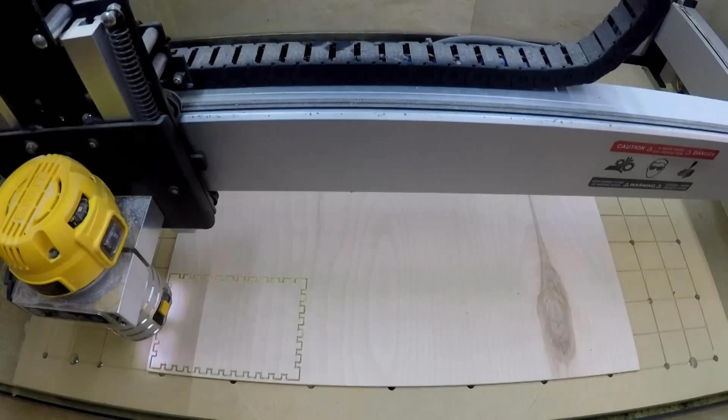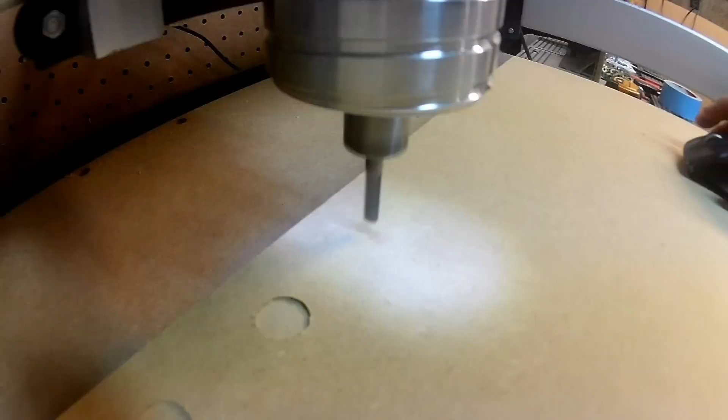Alright guys, so as you can see out here on the table, I've got a few things. This is some of the stuff that you might need to start this project if you decide to do it the way that I'm going to show you. You're going to need some 1/4-20 bolts, some washers, some 1/4-20 T-nuts, some 3/4 inch stock, and something like this possibly. I'll show you what this is used for here in a minute. We'll get rid of this for now.

So to start with, our 3/4 inch stock. If you just go to Lowe's or Home Depot, you can get poplar, pine, oak, and you can buy it in a 5.5 by 24 inch board. And if I remember correctly, once we get into actually designing this, that's the general size that I use to start with. And what you should end up with when you're done is basically just a rectangle with a slot cut in it, a hole on one end with a nut in it, and a rabbet cut in the end of that. So this is a pretty simple design for a hold down.

Now, one thing I didn't mention in the last video of some things that you should buy to get started was some double-sided tape. When I first started, I used double-sided tape for everything, and it does work, but I wanted a more permanent solution that I didn't have to keep spending money on, and something that I didn't have to do as much work. Because with double-sided tape, you have to cut, stick, peel. It's just a pain in the butt. But for your first couple projects, this might come in handy.

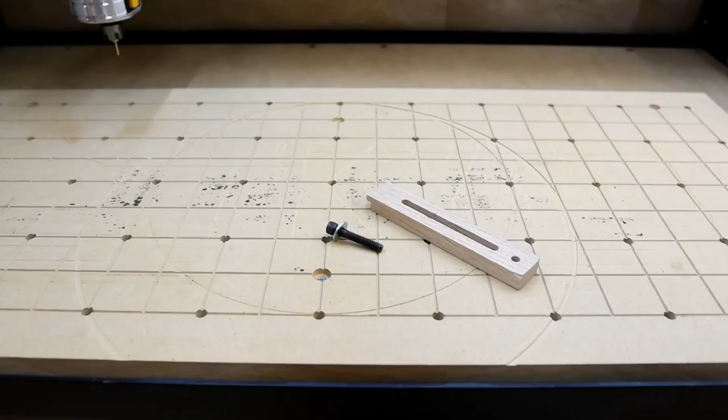Aside from the hold downs, the second thing we're going to discuss is our wasteboard, and this is what the hold downs are going to connect to. Now, I'm not going to go through and design a wasteboard in this video because I have another one that I made where I go through in detail on how to make this. I'll put a link at the bottom in the description so you can watch that video and get an idea of how to make a wasteboard.

The basic concept is you put your stock on the board. This will go next to your stock, and then your bolt goes in and it holds it down. You tighten it and it won't move. So pretty simple concept. What you're going to need also is probably a sheet of MDF, maybe even just a half sheet if you don't want to buy a full one.

MDF is pretty common as wasteboard material. It's not super expensive, and I bought a full sheet when I bought my machine. I've made 3 or 4 separate wasteboards now, and I still have a ton of it left, so it'll last you a while as long as you take care of it. Anyway, so wasteboard, hold downs, that's the focus of today. So let's get inside, we'll get on the computer into VCarve, and we'll show you how you make this stuff.

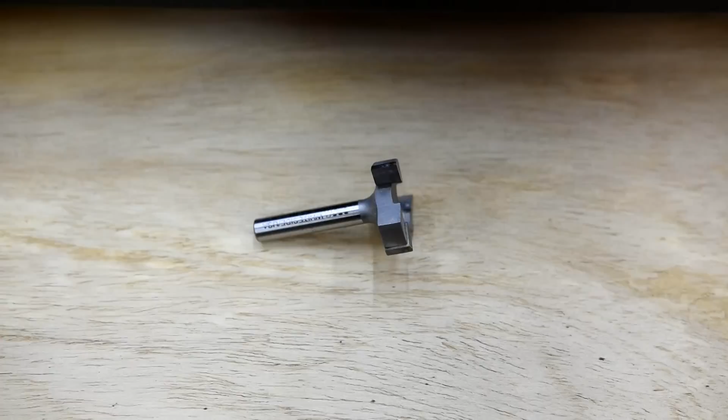Okay, now one thing I did forget to mention is another bit that you're going to need. And this right here is going to be a 1-inch surfacing bit. This one's made by Whiteside. It runs you about $33. And this is one bit that you're going to need. You're not going to use it a whole lot, but you're going to find that you have to have it.

The reason you have to have it is, what good does it do to have a machine with a surface that's not completely flat? You're going to end up with horrible cuts. So what this is going to do is it's basically going to be put into a tool path where you run it across every surface of your wasteboard, and it's going to level it completely.

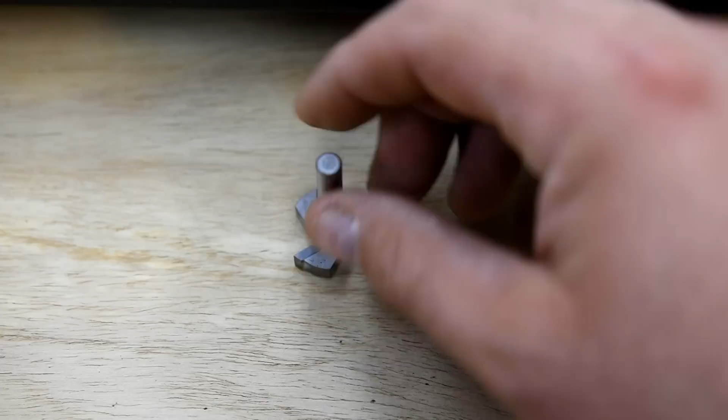You can't get away with not having one of these, really. If you do, you're either extremely lucky and have a perfectly flat board, which I doubt is going to happen, or you're using a 1/4 inch bit, and it's going to take you forever. This is going to take off a lot bigger chunk than a 1/4 inch bit. So we'll explain how surfacing works, and I'll show you a real easy way to create a toolpath in VCarve or any other program to actually surface your wasteboard.

Alright guys, we're back at the computer and we have Vectric VCarve Pro up here. So what we're going to do is we're going to come over here like we usually do and create a new file. So for this file we're going to use a piece of wood that's 24 inches long by 5.5 inches wide, which is going to be your common size for your big box store wood that you buy that's 1/2 inch. Once again, 1/2 inch. And you'll have to excuse me, I believe in the beginning of the video I said we're using 3/4, but that was wrong. So we'll click OK, and it's going to pull up our work area here.

Alright, so first thing we need to do is we need to decide how big do we want these hold downs. Well, I've got a couple different sizes, and I think somewhere right in the middle is probably pretty good. So we're going to start with this right here. We're going to draw a rectangle. What do we want it? 5 inches long, or wide if you will, and 1 inch tall. And we'll create it. Pretty simple.

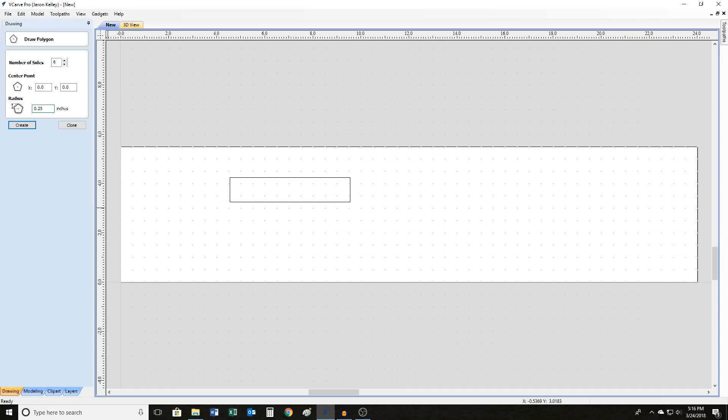First thing we need to do is we need to make a pocket for the nut that goes in the back. So we're going to come over here to our Draw Polygon tool. We want it to have 6 sides, and I've measured it beforehand, and I know it is a 1/2 inch. Now, oh, excuse me, not a 1/2 inch. That'd be a 1/2 inch diameter. It's going to be 1/2 inch radius, so it's going to be a 1/4 inch, and that looks a little bit better.

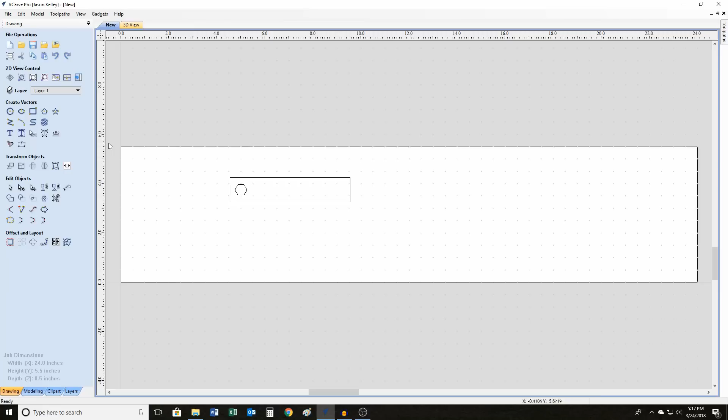Okay, so we're going to take this and we're going to move it up here to the spot where it goes. And here in just a second, I'm going to show you how you center it in there. First thing we need to do, though, is decide how long we want the channel that's going to go in there. So, once again, we're going to get a rectangle tool here. And we know we're going to want it a 1/4 inch high because that's how wide our bolts are. So, 1/4 inch wide. And the length of that channel, we'll just say, is going to be 3 inches. And we'll see how that looks.

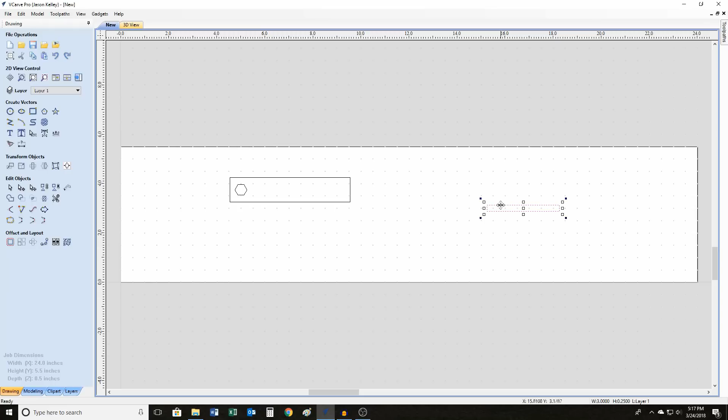Close this and get it and bring it over. And, you know, that's pretty good. If you wanted to make it a little longer, you could. A little shorter, you could. I'll tell you what, let's make it just a hair longer. And we'll make it 3 1/4 inches.

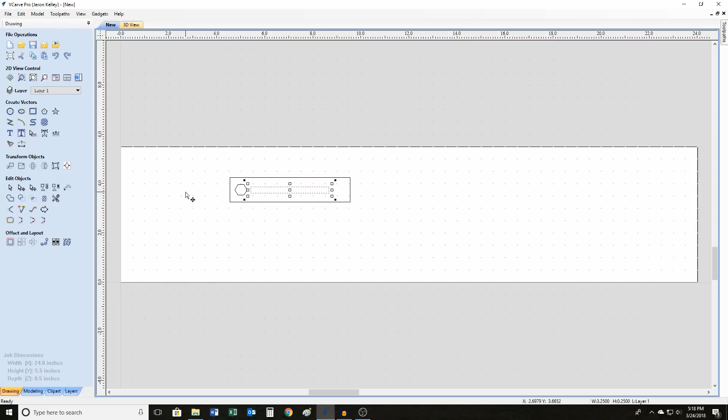And we'll call that good. Keep in mind, the length of that channel that's going to go in there is going to give you a little bit more leeway in where you can actually put your hold downs, and that also is going to depend on how far apart the T-nuts are in your wasteboard that you have created.

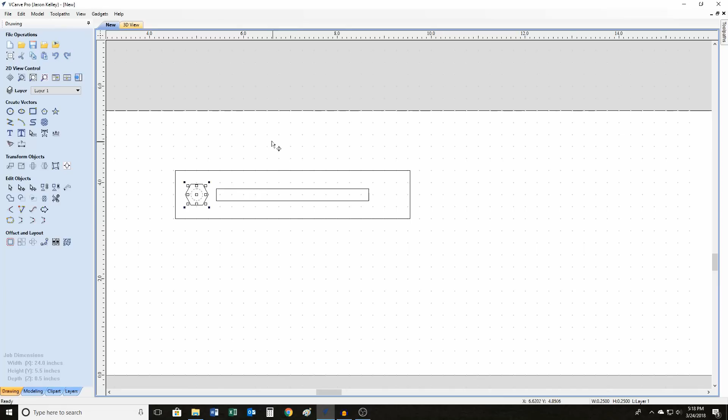So next thing we need to do is we need to make a hole inside of this for a bolt to go through. So we'll come over here, and we know the bolt's a 1/4 inch, so we'll create. Okay, we're going to take that and we're going to drag it over here. And it should snap to right in the middle of that, which it has. So that's excellent.

Alright, now we need to decide if this is going to be closer to the bolt or closer to the end. Well, you're going to put a rabbet in the end of it, probably a 1/4 inch. So you don't want it too close. And it's really just however you want it. There's no absolute has to be done a certain way. But just eyeballing it, that looks good.

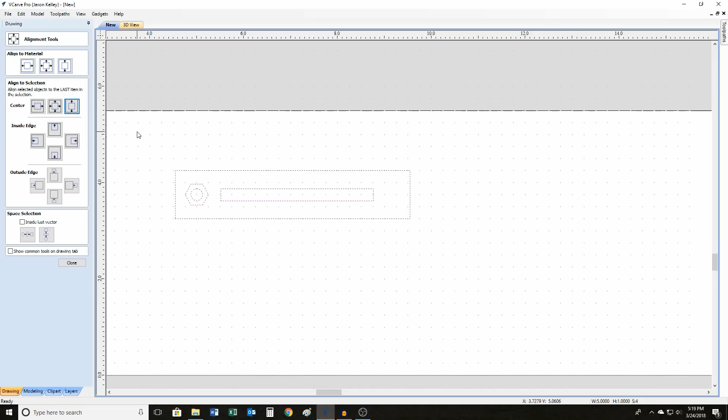Alright. So now we want to make sure that these are all centered between this point and this point. So this is how you do it. You're going to click and drag, and then you're going to hold down Shift and click on that. You're going to come over here, and you're going to use the Align to Selection, Center, and it's already centered. Now if you want to see what that looks like if it wasn't, let's go ahead and make it off center. Shift and click this, and then when you click that, it goes straight to center. So now you know how to center things within a vector.

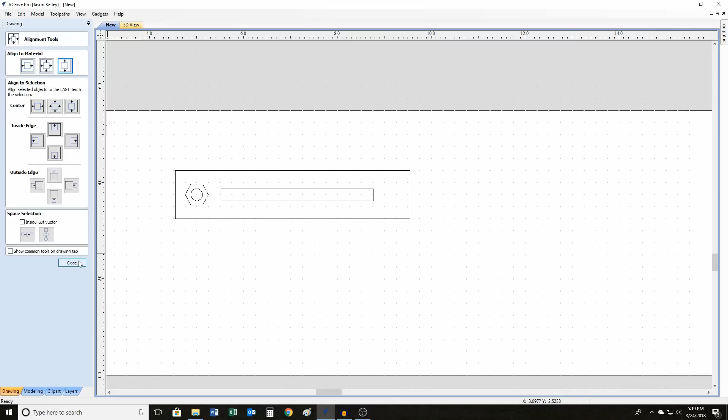Now if I were to click this, it may not center it in the vector, it will center it inside of your entire workpiece, and that's not what you want. So you have to make sure you want it centered inside of something or the piece as a whole.

Okay, so now that we've got that done, we need to decide how many of these are we going to fit on this board. Well, there's a couple things you can do. Number one, you can use a function like this where you create a linear array of copies, or you can select the whole thing. You can copy, paste, and then do it however you want. Now, for the ease of doing things, I'm going to do the linear array, but just keep in mind you can do it however you like.

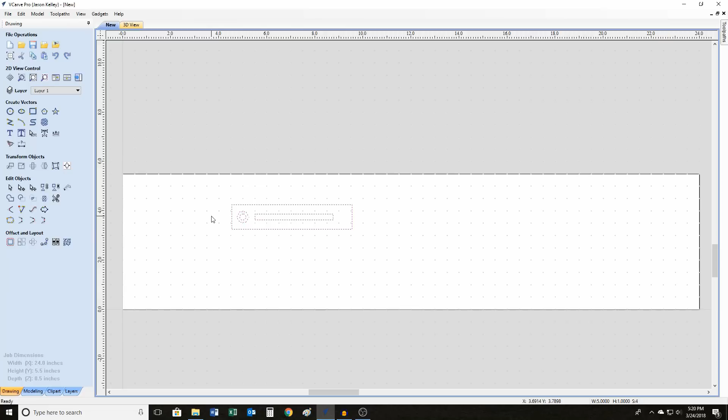So in order to do that, we're going to highlight this whole thing, and we're going to come over here. Now we need to decide a few things. Number one, how many rows are we going to have and how many columns? Well, you have to measure to decide how many are going to fit. But I've already done that beforehand, and we're going to keep this project simple.

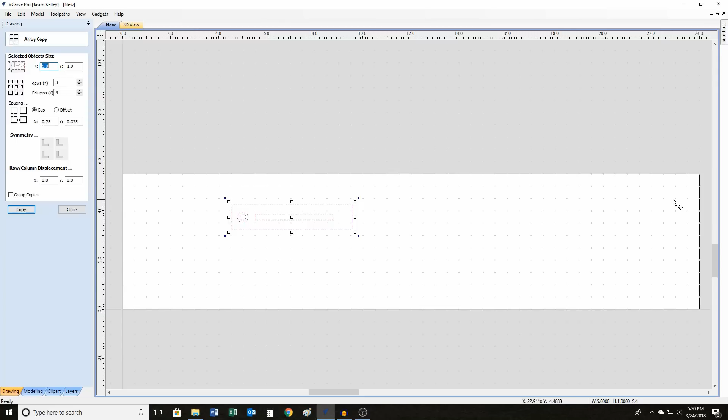So 3 rows, and the rows go this way. The columns go this way. So if I have 4 columns, I'm saying I can put 4 of these longwise. Let's see if it'll fit. We're going to center that right in the middle. And perfect, it fits. So now you have copies, see, 3, 6, 9, you got 12 of them, which is more than enough for most any project you're going to do.

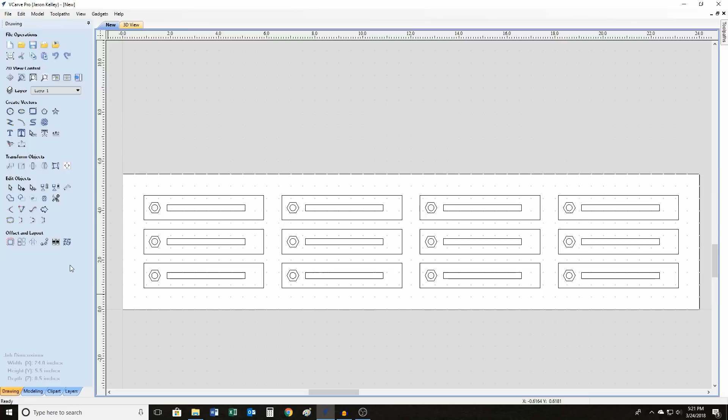All right, so now that we've got those centered in there, we need to figure out how much space is in between these. Because when you go to cut them out, it's going to make a difference, especially if you want to use tabs to hold them in. So I'm going to see just how much room is in here. And it looks like we got 0.375 inches. All right. Now, I want to spread these out just a little bit. So I'm just highlighting and moving them around a little bit.

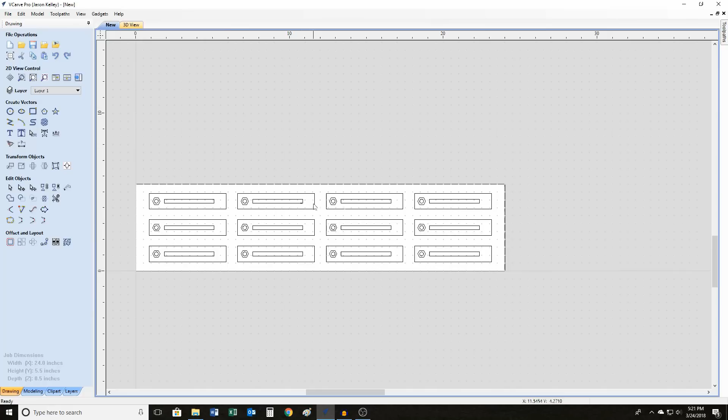All right. Next step, we need to group certain things together. And when we go to create our toolpaths, you'll understand why. Now, we're going to cut this whole thing out with an 1/8 inch end mill. We're going to cut these slots with a 1/4 inch end mill. We're going to cut these holes with a 1/4 inch end mill. And we're going to cut the pocket for these nuts with a 1/16 end mill.

So what you can go ahead and do is the 2 operations that you're going to do with a 1/4 inch end mill, you can group all those parts together. Well, almost. So first thing, the holes. So what you're going to do is you're going to click on one, then hold the shift button down and click on every single one of them.

Okay, then we're going to come over here and you have an ungroup function and a group function. You click on group. Now all those are like one piece. Click on it, they all light up. Okay, next thing we need these slots. So same thing, shift. Click on every single one of them. Okay, come over here and group them together.

Same thing with the pockets for the nuts. Oops, you gotta make sure you click on the right piece there. Just take your time. All right, now we will group all those together. And then the last piece is going to be the profile of it. And we will group that together.

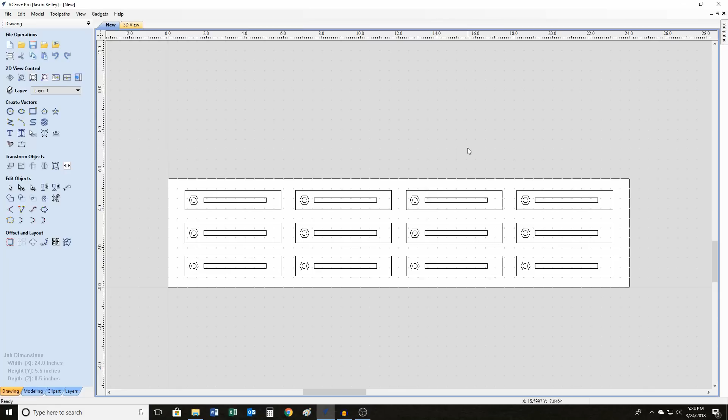Okay, so now that we have all the individual pieces grouped together in their separate groups, now we can start creating toolpaths. All right, so the first thing we're going to do is create the toolpath for the through holes. So you're going to come over to toolpaths, and this is going to be either a pocket or a profile. You can do either or. I'm going to do the profile. So for the profile, no, I take that back. We're going to do it as a pocket.

All right, so first thing you need to know is start depth. 0 inches is where we want to start, meaning that it's going to be up flush with the top of the board. How deep do we want to cut it? Well, our stock is 1/2 inch, but from the store, it comes a little over 1/2 inch. So just to be on the safe side to make sure it cuts all the way through, we're going to call it 0.510.

Okay? Then we need to select a bit. Come over here to select, and we're going to select our 1/4 inch end mill. Since the hole is 1/4 inch wide, it should fit. The feed rate and the plunge rate. Now you should know what that is by now. The feed rate is how fast it moves in any direction. The plunge rate is how fast it goes up and down. For this, 50 is good.

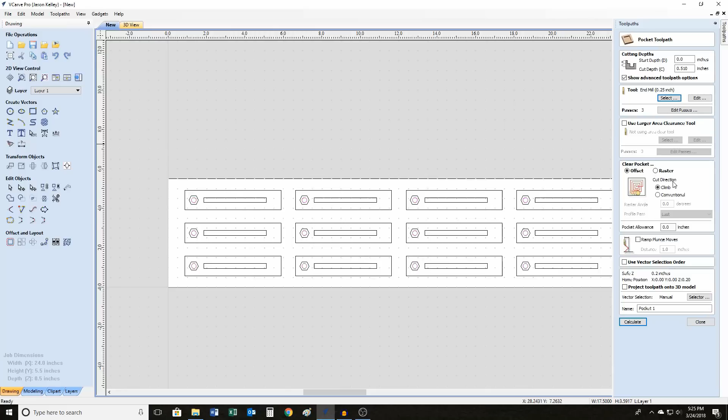And if you get online, Wikipedia, a couple other websites, they have suggestions for standard feeds and speeds. But what you're going to find is you're going to make your own decisions based off your experience and just from playing around. So we'll click OK there. We are not going to use a large area clearance tool for this operation, so don't worry about that. And it's going to ask you if you want an offset or raster. For this, it doesn't matter. We're going to keep it offset. And calculate.

Now let's go ahead and preview it. And it did what it needed to do. It punched holes right through the board, 1/4 inch wide. All right, we'll go back to our drawing view here. Next thing we're going to do is cut our channels. So we're going to come back up here. And just for the heck of it, we're going to rename this to Through Pocket, so we know exactly which one that is.

All right, so for our channel, we're going to do the same thing with a profile. We're going to leave it at 0.510, which is a little over 1/2 inch. We already have a 1/4 inch end mill selected. And what we want here is to cut the inside of this. If we cut the outside of it, it's going to cut around like this. If you cut the inside, it's going to stay inside the lines, and that's exactly what we want.

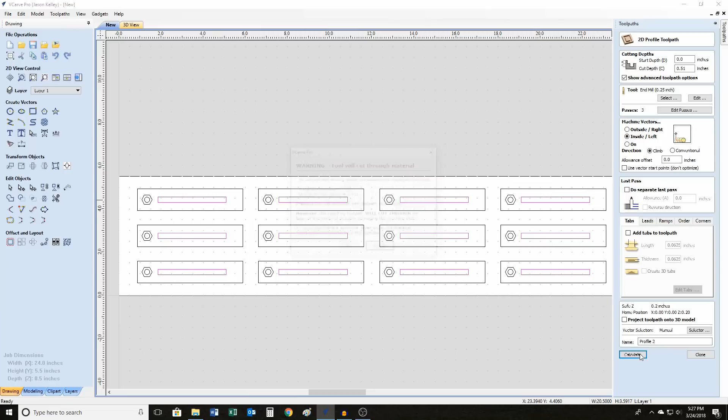If we say on the line, it's going to cut on all lines from the center of the bit, and that's not what you want in this case. So let's calculate it. It's going to tell you, hey, it's fixing to cut through. That's all right, that's what you want. And let's go ahead and preview that toolpath. And that's what you're looking at. Perfect. All right, back to our drawing view. Now we need to select the pocket that the nut's going to go in and come up here.

But before we do that, we're going to rename this one. We'll just call it bolt slots. Okay. And one thing you can do, and you have to bear with me, I'm used to doing this on my own, not trying to remember what to say when I'm doing it, but one thing I like to do is add the end mill or the size of the tool that's going in there. That way I don't get confused when I actually go to cut the project out. I'll know exactly which tool to put in which toolpath.

Okay, so now we're going to do the nut pocket. And like I said, it's going to be a pocket. So one thing you have to do is decide how deep you want it, and that's going to be based off of the thickness of the nut. It's about 0.215, but we're going to go a little deeper. We're going to go 0.250, just to give it a slight recess and make sure it goes in all the way. So our depth is going to be 0.250, which is going to go roughly halfway through the board.

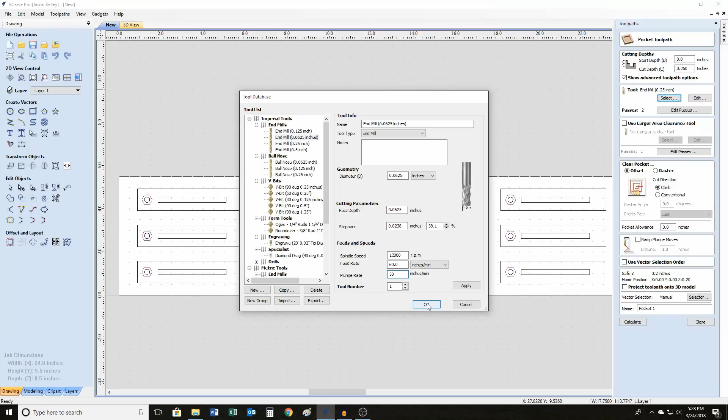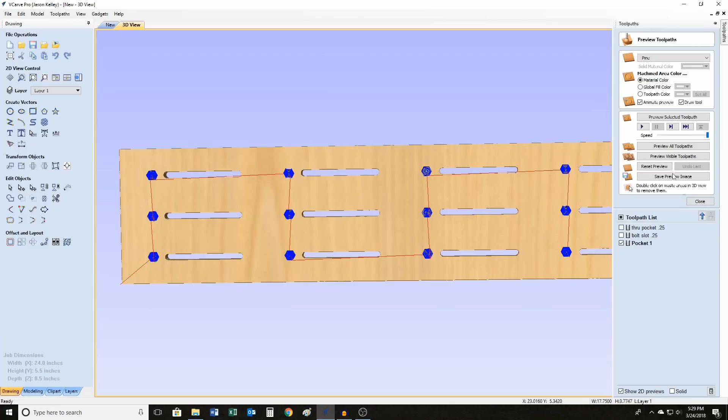It's fine. Our tool we're going to use is going to be a very small 1/16 inch end mill, 60 inches a minute feed rate, and we'll change this to 50 inches a minute plunge. Okay, so it's going to do it in 2 passes. Let's see, you click on edit passes. You never want to do a pass any more than the width of the tool, so that's perfect. And then offset or raster, we're just going to leave it on offset. Calculate that. We're going to reset this whole thing here, and we're going to preview just that toolpath. And if you look, like the toolpath indicates, it has made a pocket 1/4 inch deep, the shape of the nut. So that should work.

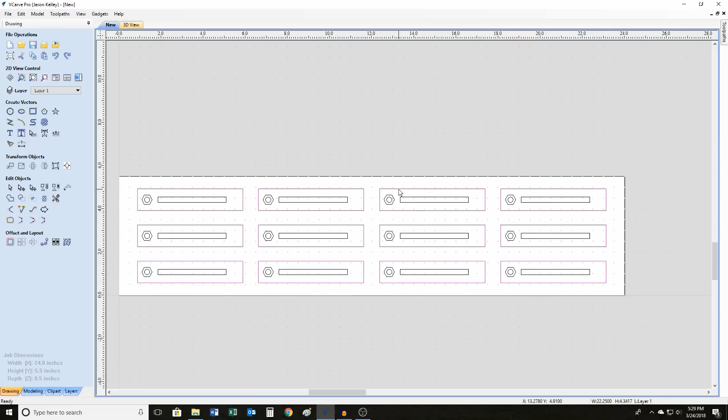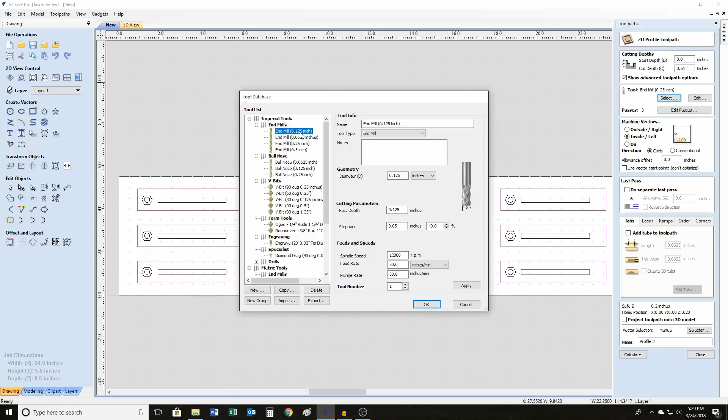All right, so now we got that done. Last toolpath we have is to actually cut this thing out. So we'll come up here to toolpath. Oh, once again, we're going to call that nut pocket 0.06. All right. Now we're going to do a profile toolpath, excuse me. And this is going to be the cutout. So 0.51, that's how deep it's going to be. Our tool for this one is going to be the 1/8 inch end mill, 50 inches a minute, 50 inches a minute plunge rate. That'll work. You might be able to go a little faster. Just keep in mind, softer woods, harder woods, you might need to change it up. We want to cut the outside, as the picture indicates.

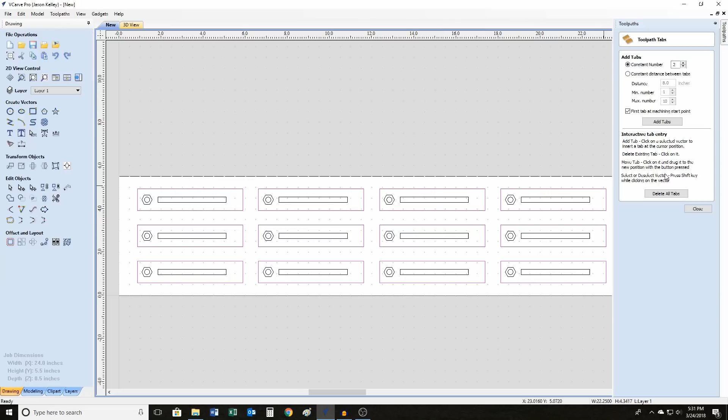Okay. Climb or conventional, when it comes to wood, I haven't really found a whole lot of difference, so I'm not going to mess with that. I'll just leave it on climb cut. All right. Toolpath to add the tabs. Now, VCarve Pro does it automatically, and I'll be honest with you, I have never used this, so this will be my first time. So, add tabs to toolpath, and then it wants to know the length and the thickness of the tabs. I think 1/16 inch might be a little too short, so we'll do 1/8 inch. Whoops. And then a 16th, let's bump that up to 0.0800. Now let's edit them. How many do we want? Do we really need more than 2 tabs per piece to hold it in? Probably not. So we'll just do 2 and add tabs.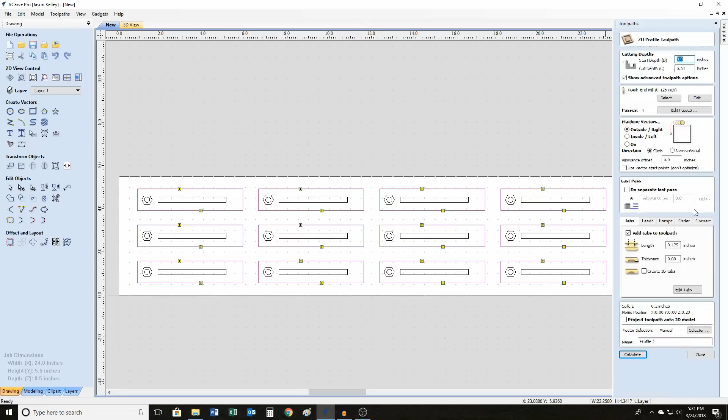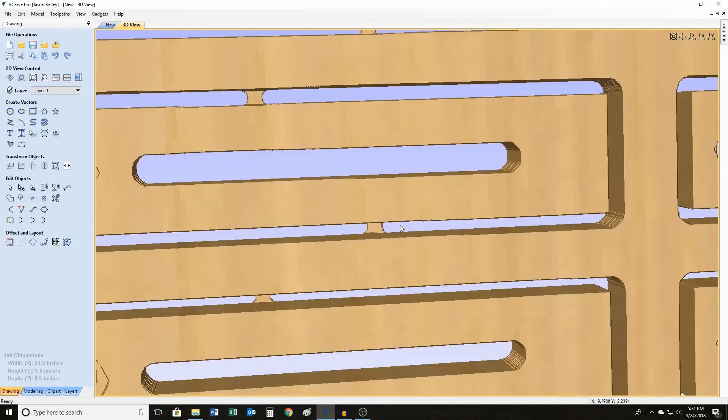There you go. It has added tabs, but I don't know if I want them in the corner. So let's see what happens when we select that. Excellent. It put them on the edges. Perfect. All right, we're going to do that. Calculate it. Hey, it's going to cut through. Okay. Let's reset this, and let's preview all toolpaths. And that's what we end up with. There's our little tabs, and that is going to hold the piece in, so when it does the final pass, it doesn't pop out and fly around and hit the bit funky. So there you go. That is that simple.

Now the last thing we need to do is rename that one right there to cutout 0.125. All right, now we got to save these toolpaths. Now you need to have a place to put them. I put mine on a thumb drive, so before I did this, I already made a folder for them to go into.

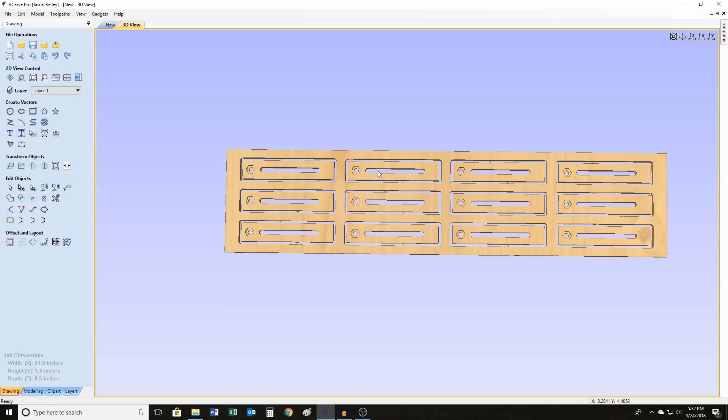So here's your Save Toolpath button. And if you remember, I told you could save 2 at one time. I'll explain a little bit more. Okay, we're going to use a 1/4 inch bit on 2 operations, cutting this little hole and this slot. Now, we can tell the machine to do those at the same time, so we don't have to re-zero or go back to the home position. It'll just do the holes and the slots all in one operation.

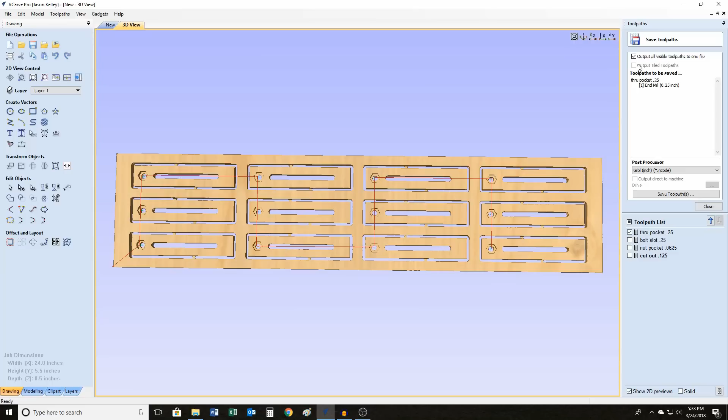So the way we do that is we'll click on one of these and we'll click this, and then you click on the other 1/4 inch one, and there you go. It'll put them both right there. Toolpaths to be saved. And what that's going to do is save them as one toolpath.

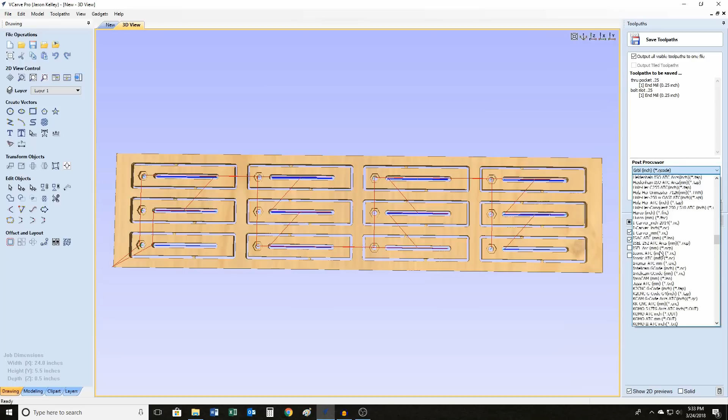Now, depending on what machine you have, your post processor may be different. Okay, if you have a Shapeoko, you're going to use Grbl inch. There may be a couple more you can use. This is the one I always use. And as you can tell, there are a billion of them to choose from. Different machines, some of them name specific, but there's a billion of them. If you have a Shapeoko, Grbl inch, it'll work for you.

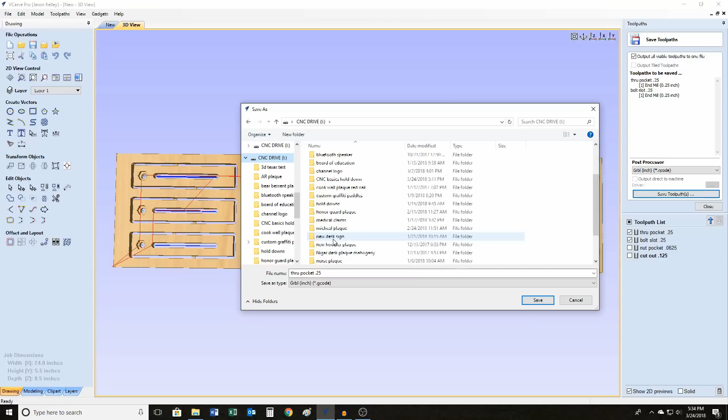All right, so now we're going to save toolpath. Now we need to find our thumb drive here, CNC drive, and let me find my folder here, CNC Basics hold down. All right. Now we're going to rename this to 0.25 through hole and slot. Save that. All right. So that toolpath is saved.

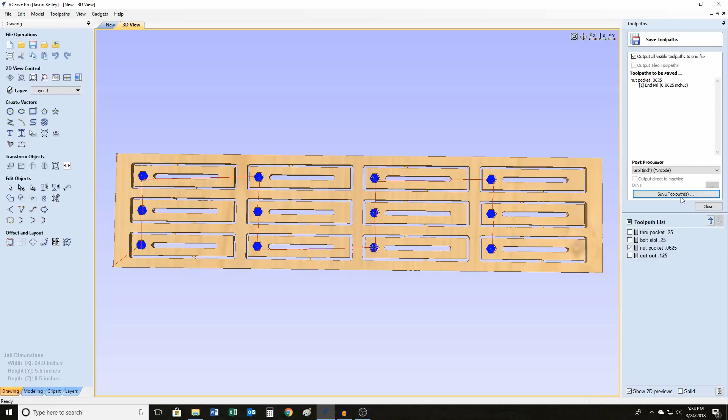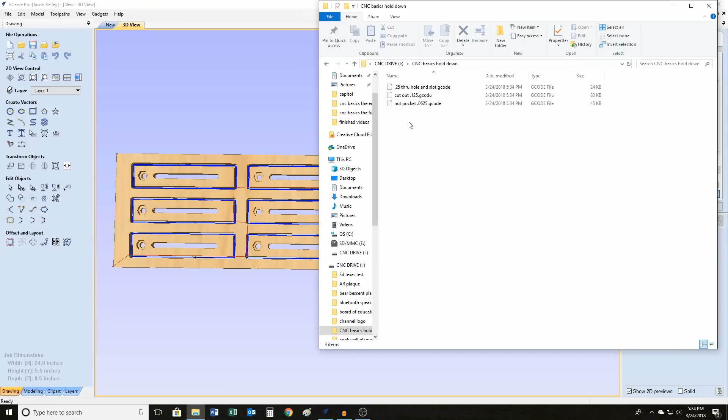Next thing, the pocket for the nuts. Save toolpath. And we're going to call that nut pocket 0.0625. It's already there. Click Save. Do the cutout. Save toolpath. Save. Now if we go to our thumb drive, it's here somewhere. There's our 3 toolpaths, and that's it. Now you take it out to your machine, plug it in, and do all your cutting.

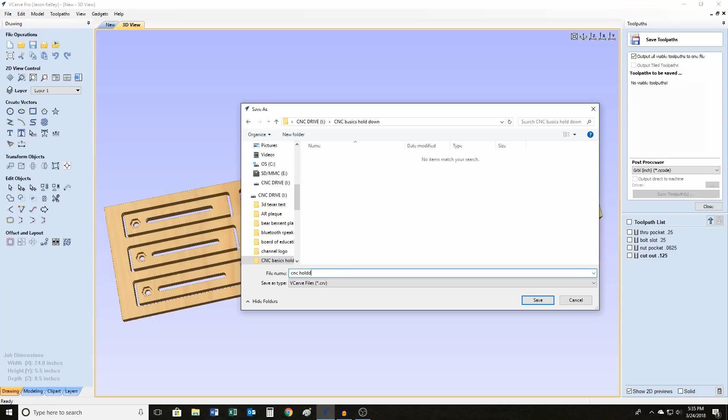So that's as simple as it is to design some hold downs, and it's a really good starter project because you're really going to want them and you're going to use them. Next thing I'm going to do, I'm going to save this just to make sure in case I lose something here. We're going to call it CNC hold down file.

All right. Now, I told you I was going to show you how to do, man, I can't think, a surfacing toolpath. All right. So let's say your wasteboard, just for the heck of it, is 30 inches by 15, and it's 3/4 inch thick. So for surfacing a wasteboard, there's probably several ways to do it. This is the way I do it. And the reason I'm touching on this is because I did not discuss it in the original wasteboard video much.

But the way I did it was I just drew a rectangle overlapping the outside of it a little bit, like that. Okay. And then I ran a pocket toolpath, and I surfaced mine at 1/16 of an inch deep. Select my tool, and the tool that I used was an end mill that was 1 inch wide. I never saved it in there, so you can just change the preferences of the tool that's there, and you can add new tools, which is another video, but it's a 1 inch diameter tool.

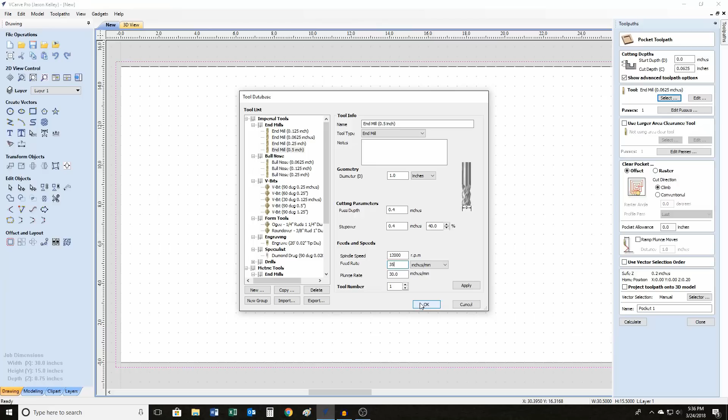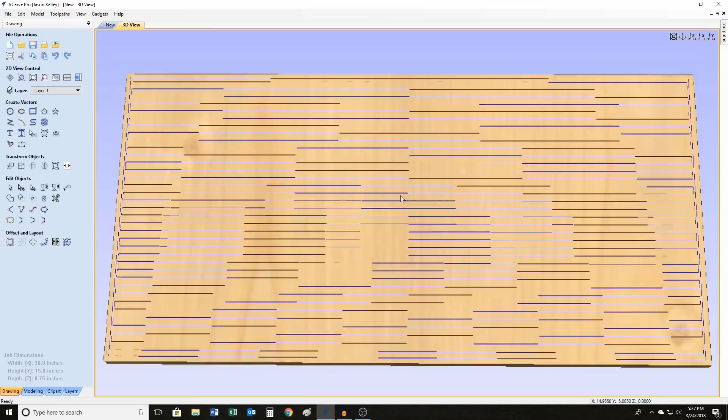We go a lot slower when we do that. I think if I remember correctly, I went 35 inches a minute, which is pretty slow, but it works. Click OK and calculate, and that's the toolpath. Now you can do it a couple different ways. If I was you, I would actually do a raster back and forth, recalculate it, and it'd go back and forth like that. So that's how you surface a wasteboard and create a toolpath for it. Pretty simple.

So anyway, that's going to be it for today. The next video I put out, hopefully tomorrow, we'll get to the machine and show you the basics of how to zero it out for your project, how to load your files, do your cutting, change tools, and do all that stuff.